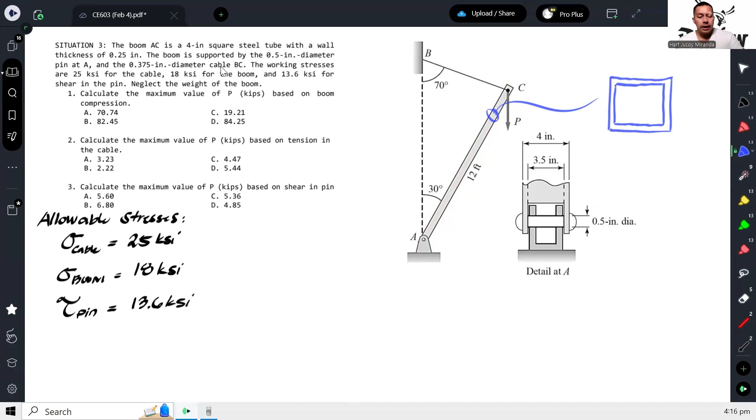So that means this is 4 inches, since the thickness is 0.25. So that means the internal dimension is 3.5.

So that's why here you can see the view at A. Here, if you look at this, there's a pin, a support, and as you can see the cross-section, this is the 4, and this is the 3.5. Okay?

So, what is the value of P based on the boom compression? To answer that, let's analyze the forces. So, pin here, cable here. I think we can just apply the equilibrium equation at joint C.

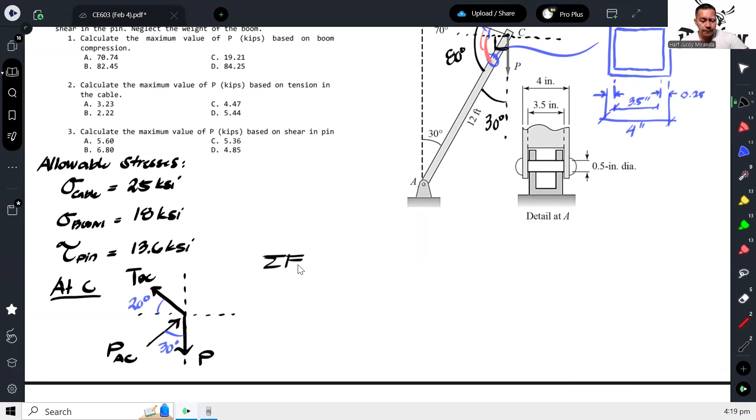Okay, so we can proceed with summation of forces. Taking summation of forces, let's do X first. We have negative tension in BC times cosine of 20 degrees, then we have positive force in AC times sine of 30, and that's equal to 0.

And from here, we can create a relation between BC and AC. So if you want to solve the tension in BC in terms of AC, it becomes PAC times sine 30 over cosine 20. And at the same time, you can also solve the force in AC in terms of tension in BC, just flipped: cosine 20 over sine 30. So now we have a relation between the two forces.

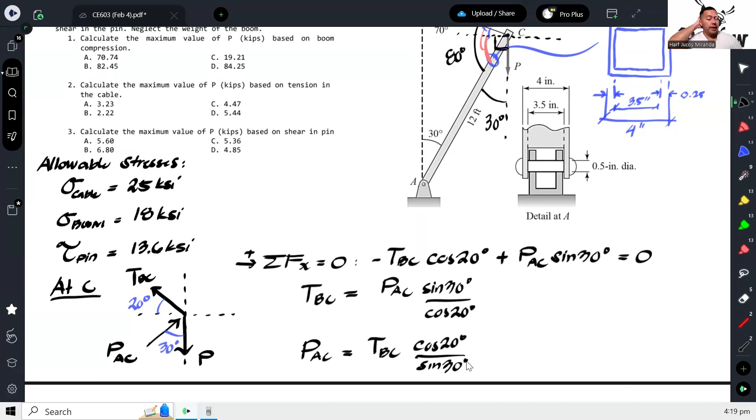So next, let's take summation of forces Y equals 0, assuming upward positive. So this is tension in BC, sine of 20 degrees, upward, plus force in AC, cosine of 30 degrees. Then downward is P. So let's equate it: equals P.

Okay, so now, based on allowable stresses, what's the first question again? For the boom, so for AC. The allowable stress for the boom is limited to 18 KSI.

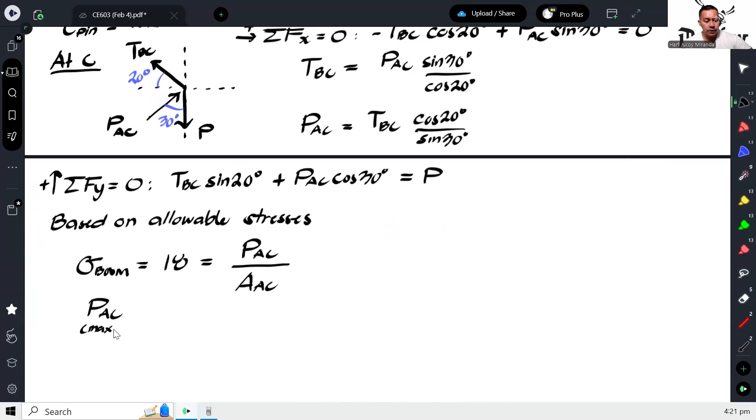Okay, since stress is force over area, therefore we would be able to calculate the maximum force allowed in AC. And that is 18 times the area in AC. And the area in AC is this one, that area.

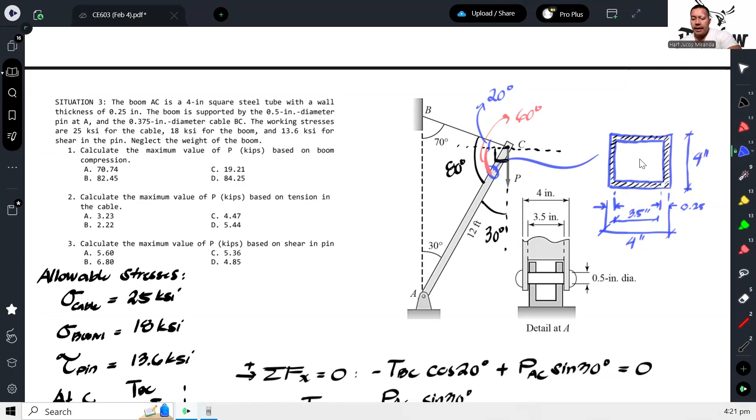And what is that? How do you compute that? So it's just the area of the big square since it's 4 by 4, minus the area of the hollow square which is 3.5. So that gives us 4 squared minus 3.5 squared. So that's the maximum force allowed in boom AC before it fails.

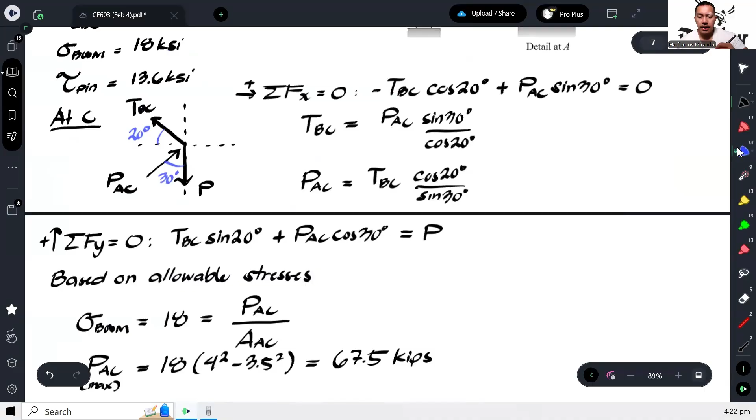Okay, and that gives us 67.5. So hanggang 67.5 lang yung limit niya. May sira na siya. So ngayon, to solve for the value of P, what we would do is tawagin ko

tong equation 1, equation 2, equation 3. So dahil na-maximize na natin yung force sa AC, bali yun yung ipapasok ko dito. Problema ko ito. So take note na ito, pwede natin isulat in terms of AC gamit ang equation 1.

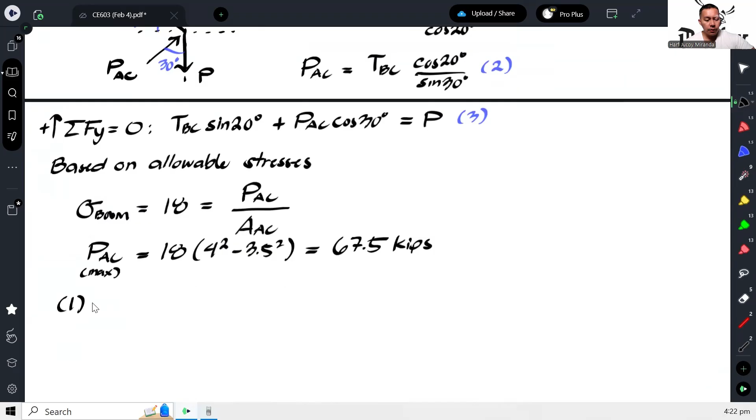Gawin muna natin. Equation 1, substitute natin sa equation 3. So magiging, yung TBC magiging PAC sine 30 over cosine 20. Yan yung TBC. Tapos times sine 20 plus PAC cosine 30 is equal to P.

So ngayon, dahil we want to know ano yung maximum P dito based doon sa capacity ni AC, so ang gagawin natin, maximize natin yung AC. So ang isa-set natin na value niya is 67.5. Kapag ginawa natin yon, yung maximum value ng P would be equal to 67.5 times sine 30, sine 20 over cosine 20. So factor out ko na kasi pares may PAC times cosine 30. Ayan. So lalabas ay 70.74.

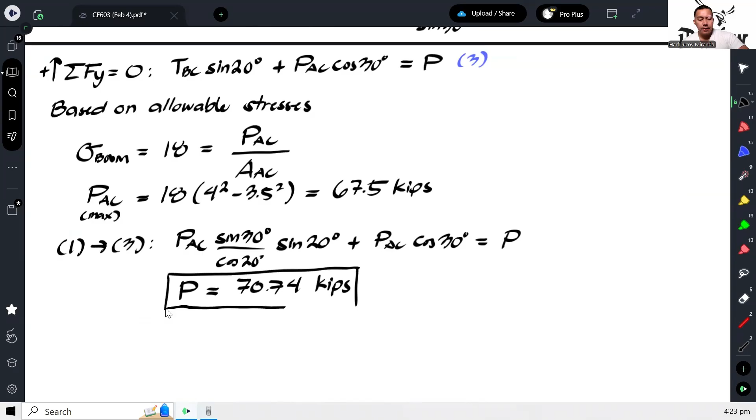Okay, so that is the maximum value of P without exceeding the allowable stress in the boom. And that is letter A.

Okay, for number 2, calculate the value of P based on the tension in the cable. So meaning without exceeding the allowable stress in the cable. So sa cable 25 KSI naman. So yung allowable stress sa cable ay equal sa 25 KSI, and that will be equal to the tension in the cable over yung area ng cable.

At sinabi naman na yung diameter ng cable ay given. In fact, it is 0.375. So ibig sabihin, ano siya? Circle, no? So pi over 4 times 0.375 squared. So from here, we would be able to calculate again yung maximum na tension allowed sa BC. So that's 25 pi over 4 times 0.375 squared. And that gives us 2.76.

2.76 kips. Okay? And paano ko ngayon isosolve yung P, no? Para dyan. So balik tayo sa mga equations natin. So dito natin isosolve yun. Kaya lang, kailangan natin ito palitan in terms of BC. So ibig sabihin, ito equation 2, ipapapalit natin dito.

Okay, so equation 2, pasok natin sa equation 3. So magiging ano? TBC sin 20 plus yung PAC, ipapalitan na natin ng TBC cosine 20 over sin 30. And that will be all equal to P.

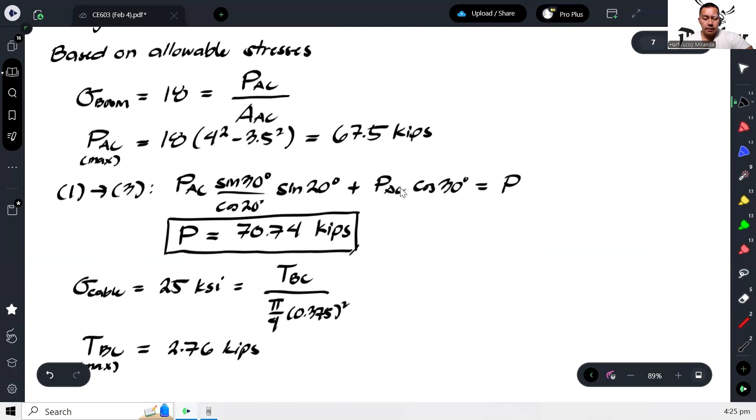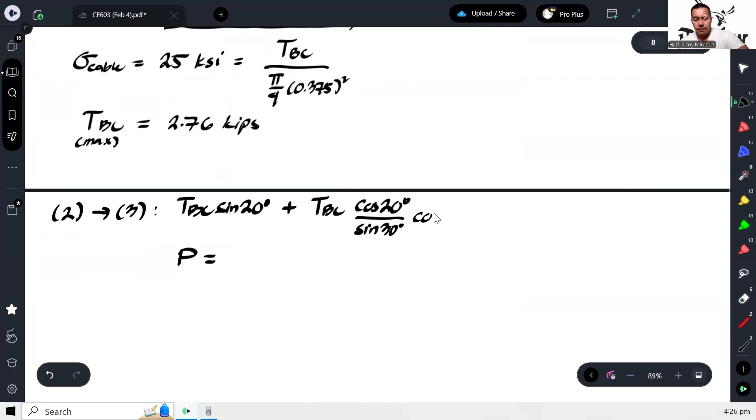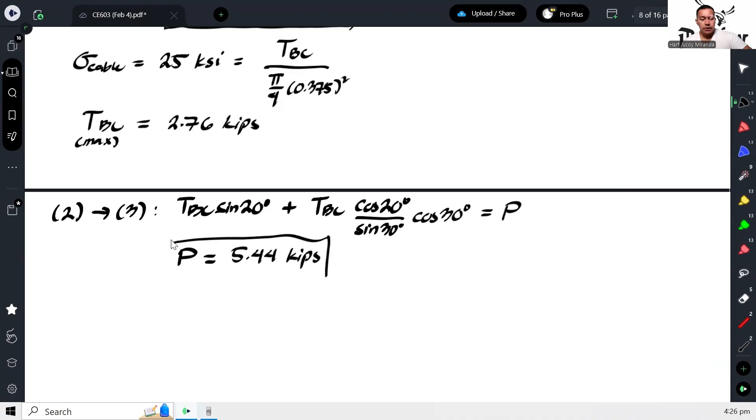At saka may papasok natin dito yung maximum na value ng P, ng TBC para makuha naman natin yung maximum value ng P. So ito yun, no? Sin 20 plus cosine 20. Ay, may kulang. Doon sa equation 3, meron pa pala dito ang cosine 30. Cosine 20, cosine 30 over sin 30. Okay, so that gives us 5.44. So ito naman yung maximum P na pwede mong i-apply without exceeding the allowable stress for the cable.

Okay, and lastly, calculate the maximum value of P based on the shear in the pin. So dito naman tayo titingin. Based sa shear dito. Okay, so di ba ano to, no? Ma-undergo ito ng stress. At yung stress na yun, manggagaling dun sa force ng boom.

So di ba, yung force ng boom, pag ganyan eh. So yung force na yun, ito rin yan. No? So bali, ito yung force ng boom. Okay, so yun yung PAC. Ngayon, kapag inanalyze natin ito, ano kaya yung magiging reaction niya?

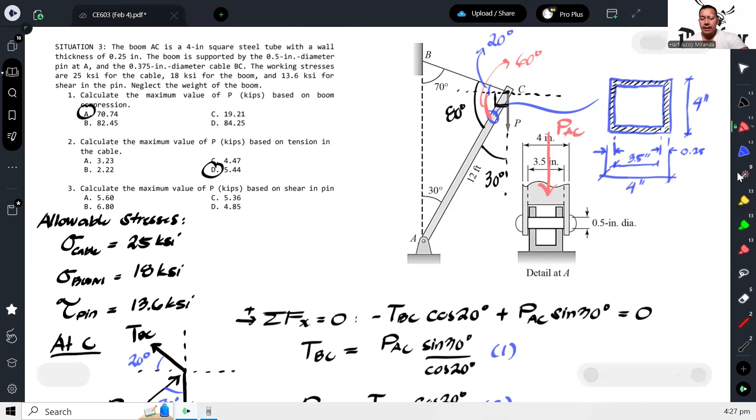So syempre, ang reaction nitong ano natin, nitong pin natin is pag ganito. Diba? At kapag inanalyze mo tong part na to ng pin, ito lang, yan, yung part na yan. Lagay ko dito ganito siya. It is subject to a force PAC. So this will be subject, yung resisting area niyan, ito, at saka itong kabila. So dalawa yung magre-resist na area. So therefore, this is subject to what we call double shear. Okay?

So, the allowable shear stress of the pin is equal to 13.6.

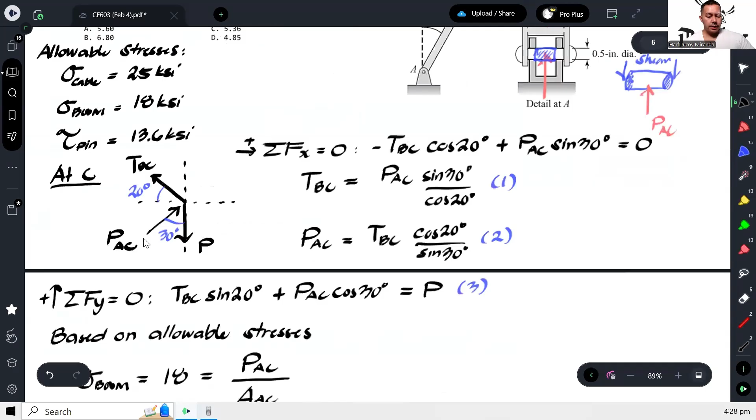Okay, let's equate that to the force AC over the area of the pin. What's the area of the pin? What's the diameter of the pin? It was 0.5 inch. So, pi over 4 times 0.5 squared. But it's double shear, so we have to multiply this by 2.

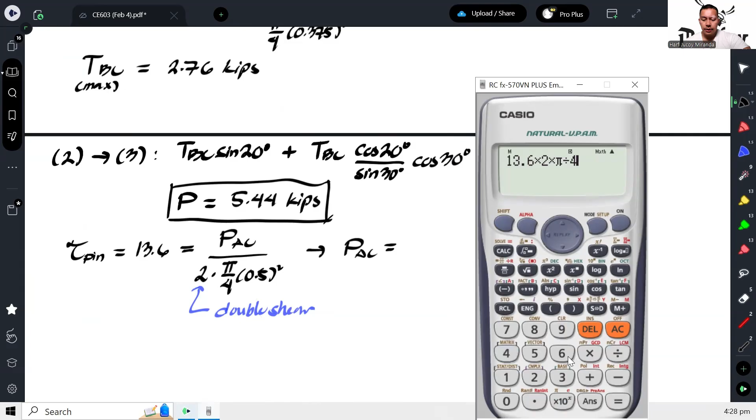No? Double shear. Okay? So therefore, the force at AC should be limited to 13.6 times 2 pi over 4 times 0.5 squared. So it should be limited to that.

5.34. Okay? And if it's limited to that, using this equation, so that we can solve for P once again. Let's call this equation 4. Using equation 4, we can calculate for the required or the maximum limit for P. So, that's equation 4.

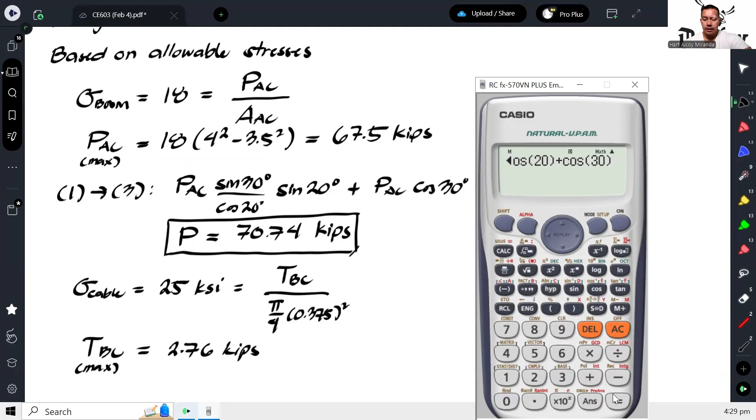So, this is now our PAC. So, we have sine 30, sine 20 over cosine 20 plus cosine 30. And that gives us 5.6 kips. Okay?

So, that's now our limit on the magnitude of P so that the shear on the pin is not exceeded. So, our answer here would be letter A.

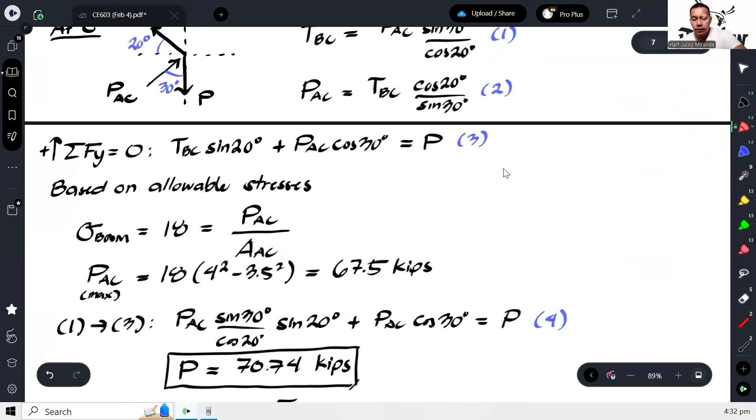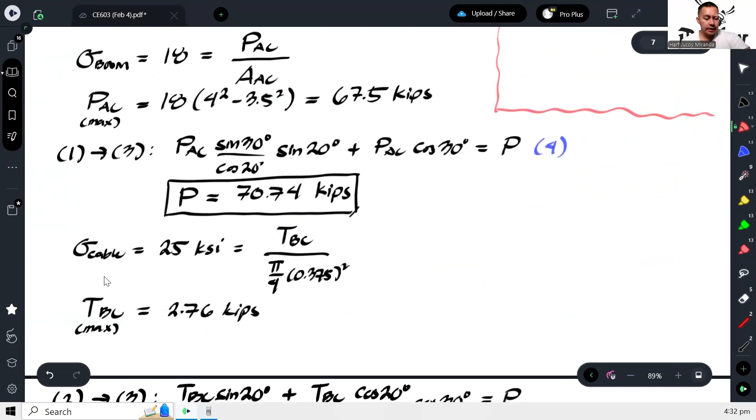Equals force over area. The force here in single shear is only half. Over area. So your area, because it's single shear, is only one -- just this region. So that's going to give you pi over 4 times 0.5 squared.

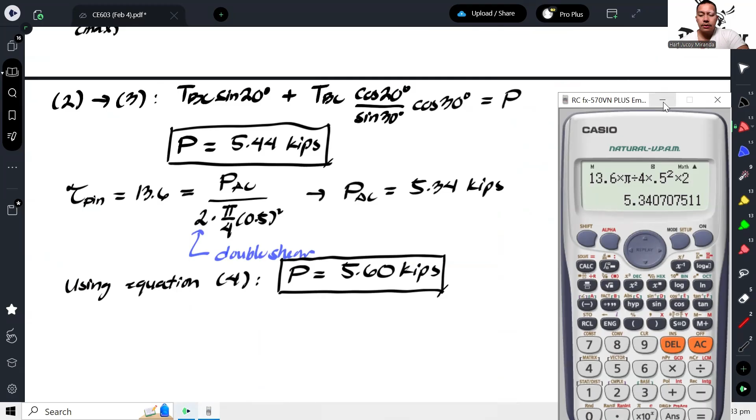Okay? So that's why even if you analyze using the double shear, which is the middle part, or you're on the side or the other side, you will get the same value for PAC. Hence, the analysis will be the same. Okay? So it only differs in value when there are many connected.

But here, since there are only two -- just the hinge itself, then one more, just two because it's just this hinge and this boom. Only two are connected. This pin, and this hinge. Okay? So whether you analyze the outer or the inner, you will get the same result. Okay? And that's how we solve this problem.